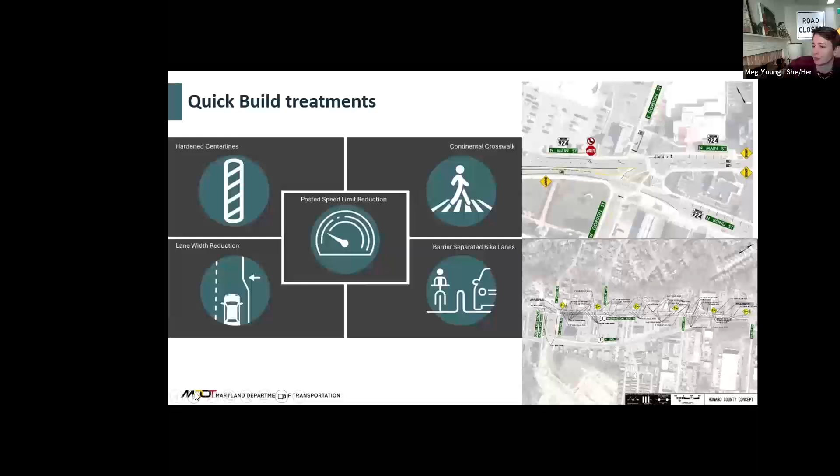So from this, we've had a lot of outcomes. Here are just 2 pictures from Howard County, from the temporary facility, taking a motor vehicle lane and opening it up for people walking and biking.

First of all, Smart Growth America is going to be the one to publish the report on this — that's supposed to be coming out in the coming weeks. It will include the process as well as a lot of the data, interviews from users, and of course all the pictures and everything.

We are also planning our continued education for engineers. I would say the conversations happening between our district engineers and everybody at the workshops was what was most inspiring for me from this process — thinking about how a state route going through the middle of the town of Bel Air, as their main street, does not necessarily need to accommodate the largest freight vehicle out there. It is a main street, close to an elementary school, and talking through those details and different modal accommodations with our engineers was really inspiring.

Thinking about how if we're talking about building out a network for people walking and biking, there's also a network for freight, but they might not always be the same — it sparked a lot of conversations, even about collecting data once we got past the design phase, and how we were collecting data was also interesting to me.

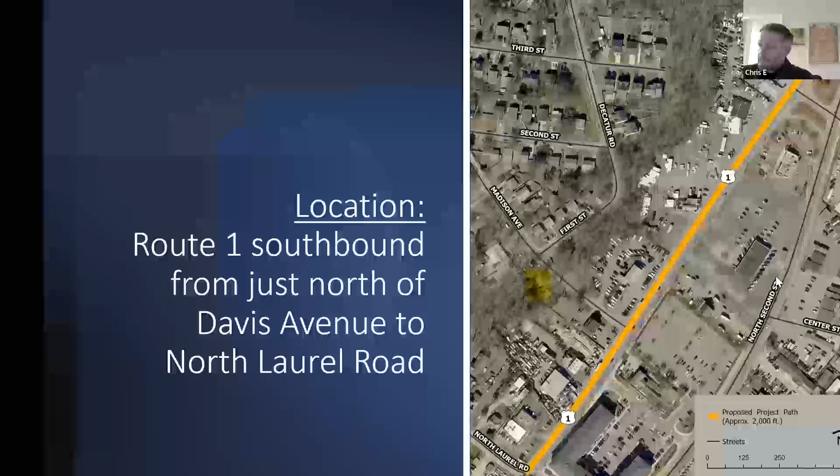So we wanted to see what could be done to work more within those 4 travel lanes on southbound Route 1 and repurpose the outer travel lane into a bicycle pedestrian area, to measure the impacts and see how that changes operations and the pedestrian and bicycle experience. Those were all things that we wanted to look at during the pilot.

So these images kind of show the concept of what we did here. Again, we repurposed that outer lane on southbound Route 1. You can see it both in the aerial drone view and on the street view there.

So we did this for about a 3.5-month period towards the end of 2024. And because it was a temporary demonstration project, we did it with somewhat temporary materials, so mostly flex posts to protect the bicycle pedestrian area, and then a good amount of markings.

As you can see there, all the business entrances were marked as crosswalks across the business entrances, because there's a good amount of them, and vehicles still needed to get in and out of the driveways for all those businesses. So that was very well marked with crosswalk markings and flex posts to basically protect the pedestrians and cyclists from the main travel direction, southbound Route 1.

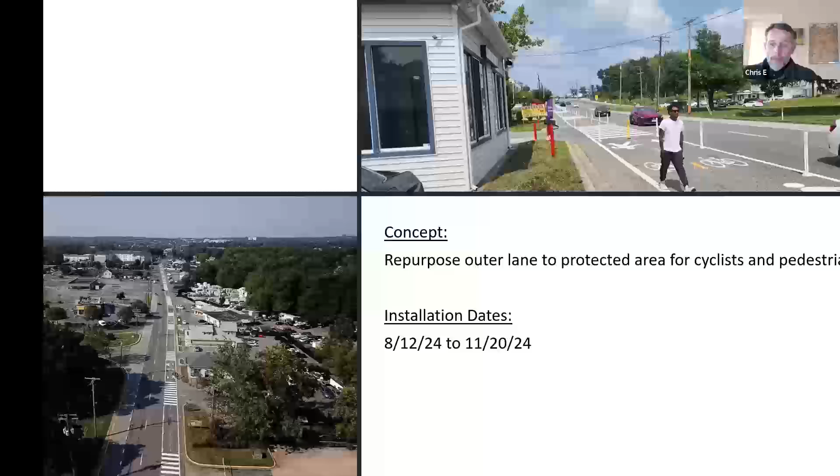We do have some data from the project. Overall, we certainly consider it a success in terms of what we learned, and also we believe we improved the pedestrian and bicycle experience and safety considerably during the 3.5 months of the demonstration project. And the data does bear that out. We have to keep in mind that it's only 3 months worth of data, and some of the numbers are quite small, especially the crash data, which thankfully is small. But it does still point to we made improvements, or at least we certainly didn't make anything worse.

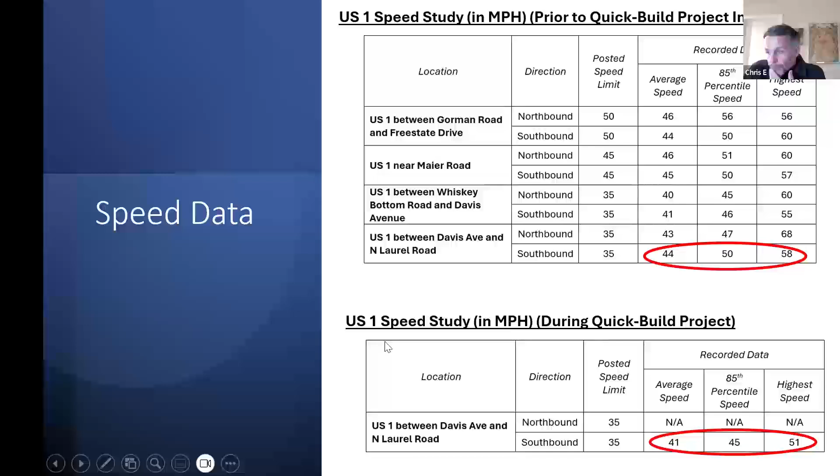And you certainly felt the road was a little slower. I mean, it's still a high-speed roadway. 45 is still a high speed, and some people are obviously going faster than that. So it still felt fast, but it felt extremely fast before the implementation. So that was kind of a bonus finding for us.

We also looked at bike and pedestrian volumes on the corridor. Again, it wasn't really a primary goal to dramatically increase the number of people using the corridor on foot and on bike. It was primarily to protect the considerable amount of people that were already using the corridor without any facilities at all.

But we did want to look at this and get some counts. So we were actually able to work with BMC on this. Charlene was very helpful. BMC has a consultant that can do some bike ped counts using 24-hour, 7-day-a-week video camera counting, and that provided this information.

So this is the counts for the average day in a few different locations on the implementation area. These are bike and ped combined. I didn't break them out, but it's very much mostly pedestrian. There were only a few cyclists sprinkled into these numbers, probably 90 to 95% pedestrians.

You can see there that for instance, in the upper count location, we had 17 people on average per day. The blue arrow with 17 is to indicate the southbound side, and the northbound side actually has pedestrian and cyclists - one cyclist and 2 pedestrians going northbound. So the good thing about that is our installation was on the southbound side there, on the southbound pedestrian side on the west side of the roadway.

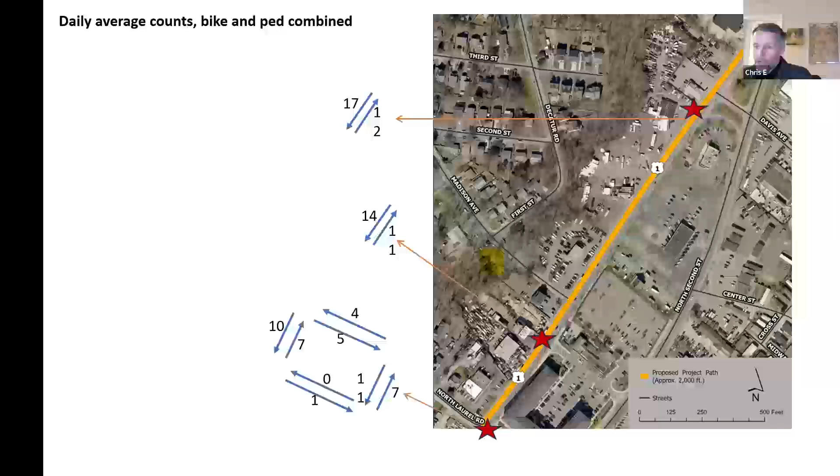To see how that compares to before the installation, we have this data, which is basically before and during, with the red data being from beforehand, which was earlier in the same year. These are average day counts. So again, we can see increases.

It's not super dramatic - the numbers went up from 28 people total going north-south on the Madison Avenue count to 31. Again, you'll notice they've shifted to the correct side of the road where we had the facility. So we were successful in getting people over to the safer side, and a slight increase in volume.

And then similar for the North Laurel Road - this is a signalized intersection with a bit more control and protection, so there's a bit more varied use of the 4 legs. But overall, there was an increase during the installation.

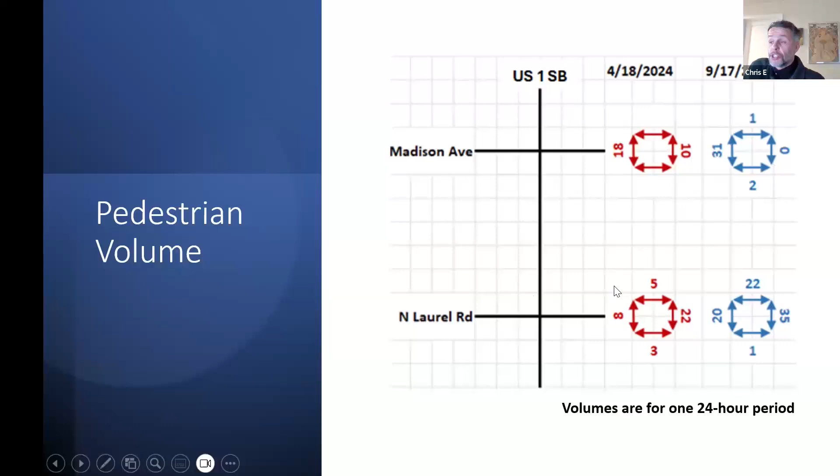Again, not really the main goal - we were trying to protect the people there, but we were finding additional people using the facility as well. These were just pedestrian counts that we had on these numbers.

So just as a summary, it's helpful to have some data from this project. We have lots of more anecdotal and more observational things that we learned as well from the facility.

We did go out and we did actually talk to facility users. We did intercept surveys as well. It wasn't easy to get these because people are not always open to talking with strangers on the street, but we were able to get some of that data, and overwhelmingly found that all the pedestrians and cyclists we interviewed were happy that the facility was there, and they all felt much safer using it with the protection than they were previously.

We also did a lot of outreach to the business owners fronting this section, because they did have concerns about access to their entrance driveways. I think the data shows that went fine overall.

We did not increase crashes. They were concerned about rear end crashes a little bit because we were repurposing that outer lane, but people were still able to turn into their businesses. It didn't cause additional crashes.

That all went fine, and business owners definitely appreciated us staying in touch with them. We had several touch points with them during the project.

Again, just anecdotally, but their main point of concern actually ended up being mailboxes and mail delivery. The mail carrier refused to drop off at their mailboxes, which are curbside, during the implementation. So they ended up having to go to the post office in the city of Laurel to pick up the mail, which is an inconvenience for them, and they were understandably frustrated by that situation.

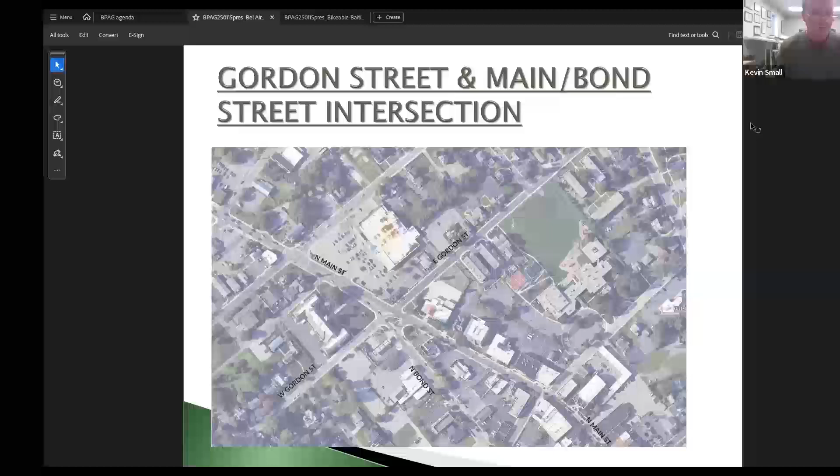This street is considered by State Highway as Route 924. The intersection is located in a split in the road where northbound and southbound traffic separate. It's really the main entry into town from the north part of Harford County, so it's kind of how people perceive the town when they drive into downtown.

What happens is people coming in from the north part of the county are driving at a high rate of speed, then have to slow down to get into downtown where it's very pedestrian heavy—that's the part that really was a problem for us. This location is also where we have walkers going to the nearby elementary school, which presented a real issue for us.

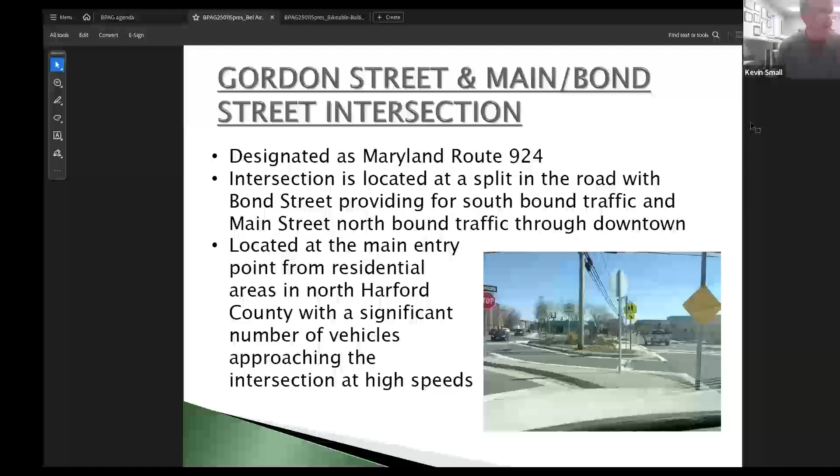It's also at a bit of a crest in the road and a slight curve where the pedestrian isn't as visible, and that condition really created some confusion for people driving into town.

Because this is at a split, you have basically two left turns—one going to West Gordon, the other to East Gordon. During our walk audit, there was an instance where somebody went the wrong way on a left-hand turn in order to go straight across the intersection. That was evidence there was some major confusion, and the number of movements needed to be reduced.

Also, this is a connector to the Liriodendron Mansion, located west of the intersection, an event venue that attracts a lot of folks every weekend and most of the time during the week. That location, again with the confusion, has utilities all over the place—you can see some of the overhead lines—so it really creates limitations on what we can do.

One of the first things we looked at was the pavement markings. We didn't know it, but that was already on State Highway's priority list, so while we were studying the intersection, the pavement markings were improved and the handicap ramps were repaired—we didn't have to take that much further.

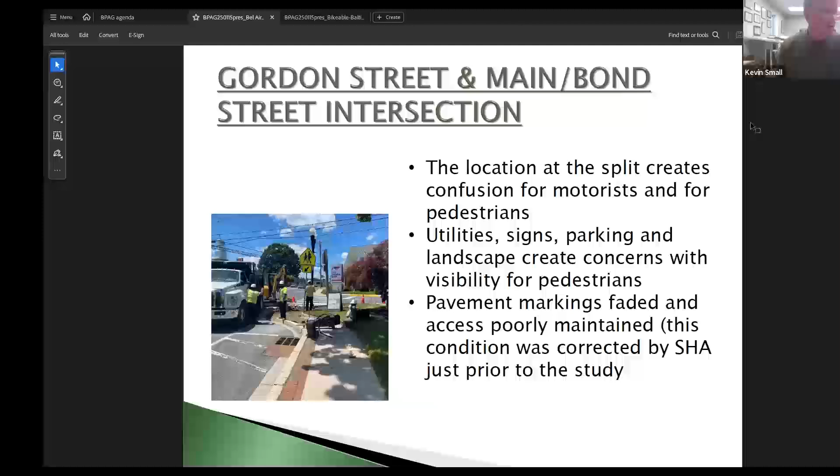Those concerns with visibility and confusion for the motorist were why this intersection was picked and reviewed. We had a public input meeting; a lot of folks showed up and we worked out a plan that I think helped address a lot of those issues.

Gordon and Main again was the highest priority out of all of them. We actually had several others in the running, but that was the highest one.

Out of that, the CSLA project was somewhat begun. This had a series of workshops, which Meg's already explained. There was a walk audit, which was very helpful and I'd highly recommend doing that in the future. It was very educational to everybody. Input was solicited via email, letter, on-site interviews, and web feedback, and we got a decent amount of feedback from folks.

We also had past data on speed, volume, and accidents where we reviewed that. What was nice is we had experts from Howard County, Hagerstown, State Highway, and SGA all looking at this intersection and offering various viewpoints that sometimes we didn't concentrate on or prioritize.

That was the result, this kind of markup of the plan, which was nice to see, that everybody could understand exactly what was being proposed and what was the highest priority, and we could talk that through. So we took that sketch and then created a plan.

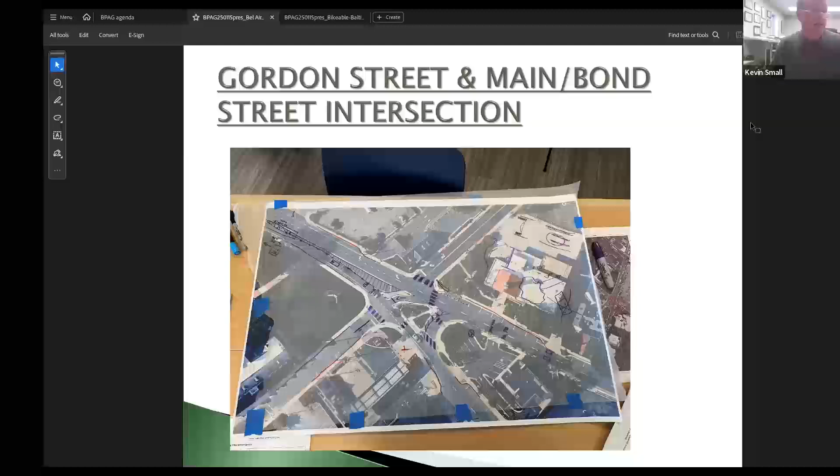Which outlined all of the various improvements, and the most significant were speed cushions, temporary speed cushions installed at the southbound and northbound approaches to the intersection. Speed cushion is kind of a misnomer, there's nothing cushioning about it. It slows down traffic, and that's probably where we had the most complaints, people saying they weren't expecting the jolt when they went over it. But that's where we got great results for slowing down cars, because they learned over time they had to be slower than they did in the beginning.

We closed the left-hand turn going to East Gordon. The turning movement now is only one left-hand turn to West Gordon, and then there's a U-turn that allows people to go back south onto what is called Bond Street. I was really expecting a lot more pushback about that left-hand turn, but once these went in, we didn't get that many comments. They seemed to be okay with not having the ability to turn left off of 924 and go east on Gordon Street.

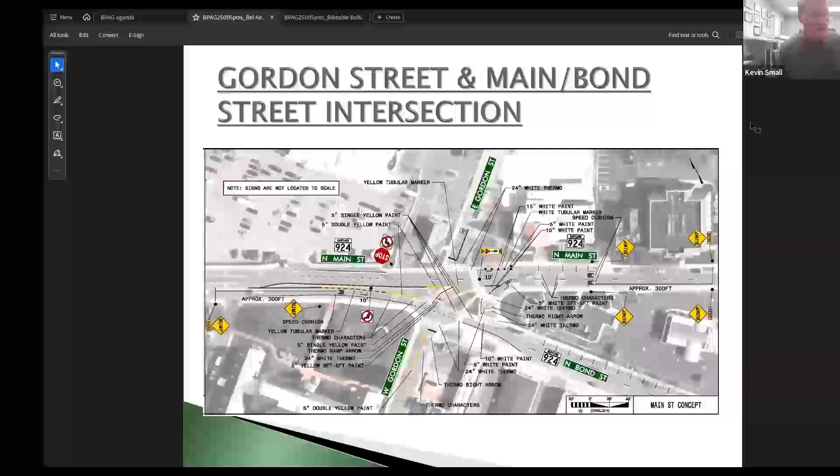We did eliminate a parking space on that side of the road on what would be northbound Main Street, just to increase visibility of pedestrians getting ready to cross, because that's the longest crossing, that's two lanes. And then we narrowed the lane width of some of the turning movements and lanes, such as the U-turn going back south on Bond Street. So there were a lot of various improvements implemented, and I think when taken together it really had a nice effect on the traffic.

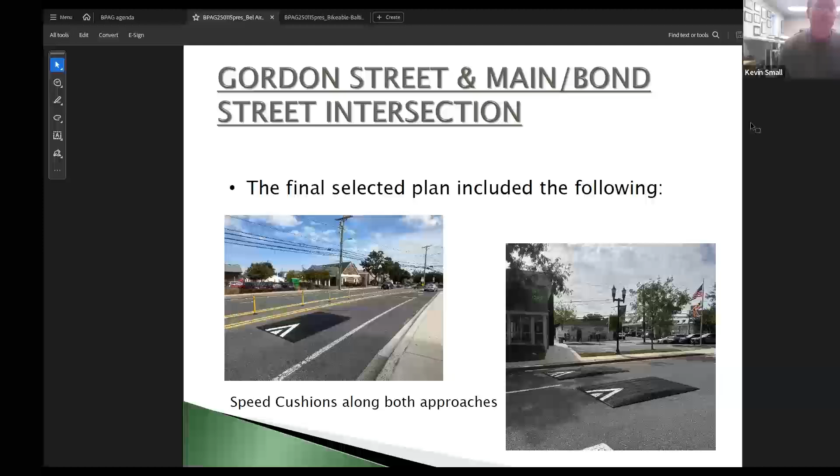I'll click through these. These show the speed cushions that were installed. These are temporary, I think this is one of the first places these have been installed, which is kind of nice. What we'll probably end up doing is taking these, since we kept them, and put them in local streets to see if we can provide a demonstration for other roads that may need speed control.

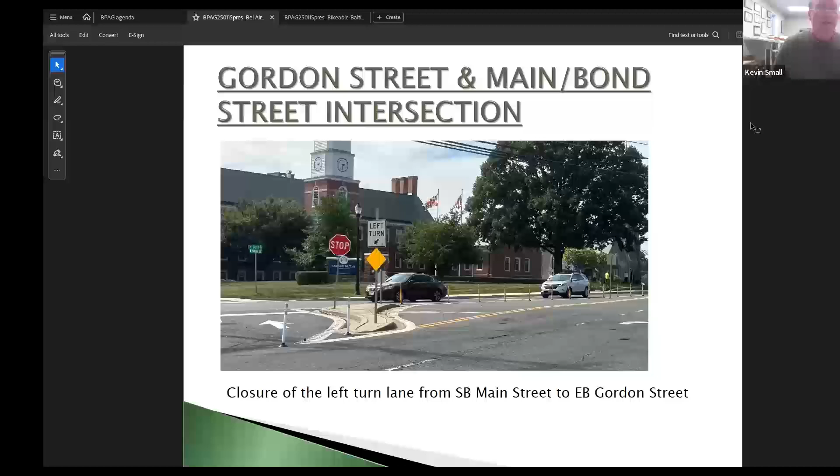That's the left-hand turn closure, which we've had our first snow, and the flex posts are still up, which is kind of amazing. I'm hoping it remains up through the winter, but again, I expected people to be upset, and they have not been, so that was a nice thing.

So the crosswalks again were very helpful, and the visibility of that crossing and where it says PED Xing, I think has helped out everybody's awareness as they move forward or use the intersection.

So we ended up doing measurements before the implementation, and then we did some measurements while it was up. We had a reduction in speed of about 4 to 5 miles an hour, which I was very happy with. I think that made a huge difference with vehicles moving through the intersection.

We already had on our books a kind of area-wide traffic study, and this intersection is included in that. We're going to measure the speed once the improvements have been removed, because we're hoping the users keep their speed down. I can understand the speed will come back up for a little bit, but I'm hoping that a habit will have been created where folks slow down when they approach this intersection.

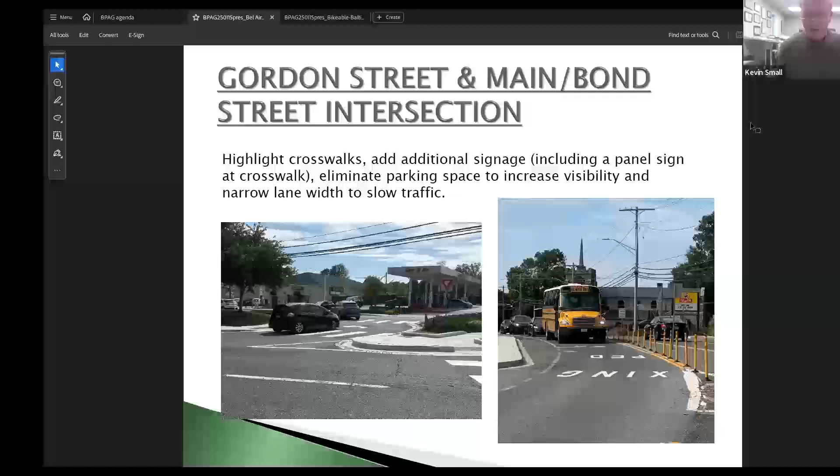We solicited input from various users, again some of the kids going to school and their parents, nearby businesses, users of the intersection. The only pushback we had was the fire department wanted to keep that left-hand turn in, because they're volunteers responding to calls. They figured out a workaround and were very cooperative, allowing us to keep that left-hand turn closed. Again, we conducted measurements of speed and volume and determined there was a nice effect on the traffic. I think people felt they were safer going through the intersection, and especially affecting the kids going to the elementary school, which was our highest concern.

Those other area studies we're going to do will happen probably around April, and we'll provide that to Meg and SHA, probably after they've completed the study, so they can see if there's been any lasting effect.

One of the final things we did, about a month ago, was have our elected officials pass a resolution to request SHA keep that left-hand turn closed and replace it with a median. That will improve the aesthetics coming in from the north part of Harford County into town, and will clean up some of the confusion or the various choices people want to make, like taking left-hand turns or doing U-turns at that intersection. I'm hoping we can coordinate with State Highway to make that permanent, and have that happen next year.

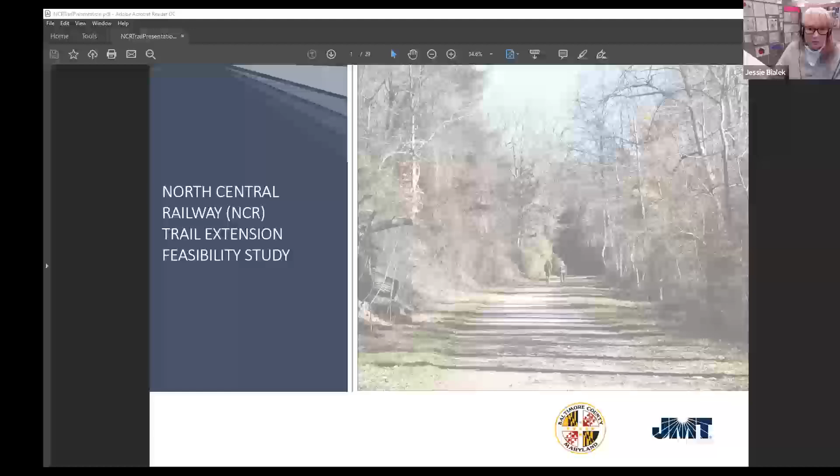Go ahead, Charlene. So just some background on the project. Like I said, the Torrey C. Brown Rail Trail is also known as the NCR Trail or vice versa. It currently extends 19.7 miles from Ashland Road to the PA Maryland line, and then it goes north from there into Pennsylvania to the York County Heritage Rail Trail and extends an additional 21 miles north to York, PA. The existing trail surface is 10 feet wide with a stone dust surface and is managed and maintained by the Maryland Department of Natural Resources.

So the goals for the project were to look at extending the trail approximately 7 miles south into Lake Roland, which basically then hits the border of Baltimore County and Baltimore City, and to create a trail that's accessible for all users, improve active transportation, and of course minimize impacts to natural and cultural resources in the area, and encourage people to use more active transportation.

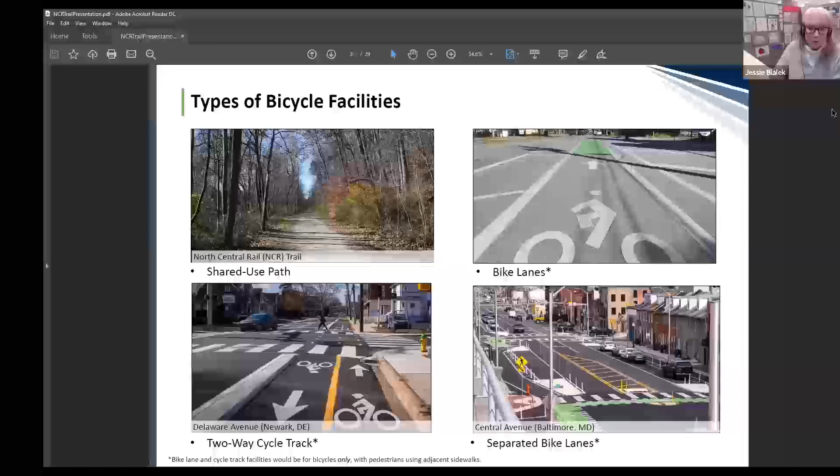So what I'm going to show next on the right-hand side is a key map going from north to south, showing what in our extension project Baltimore County considers our most feasible option for a connection between the two. I won't bore you to death reading off every single one, but I wanted to give folks an idea of where we were looking. Just an FYI, we have the whole extension study on our webpage, which I can send a link in the chat for so that people can review the entire feasibility study at their leisure. I believe it's like 200-some pages long, so trying to condense that for folks is a little bit difficult. So I thought maps would be best.

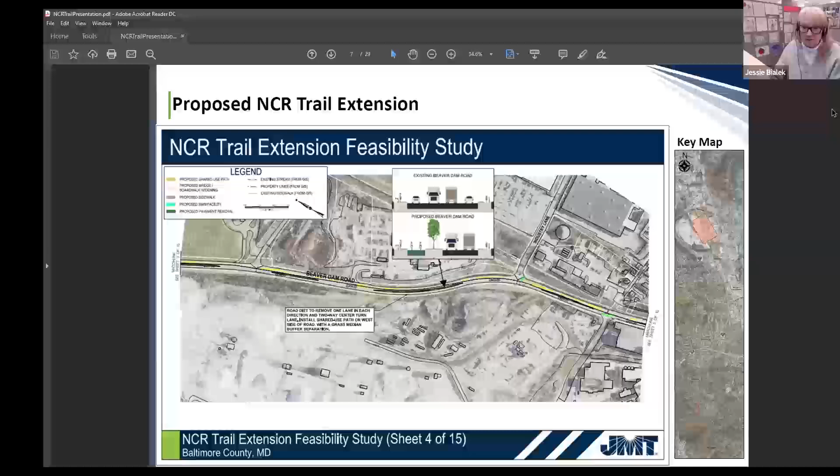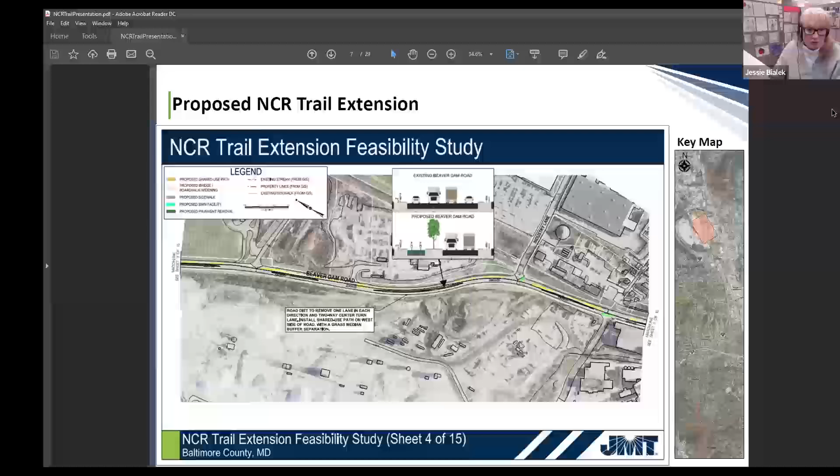So if you're getting confused, I'm pointing so people can see. On the right-hand side is our key map, so each time I go further south, it kind of shifts down, hopefully that can keep people more oriented as to where we are. So moving south along Beaver Dam Road, which basically is Warren Road, it just kind of changes names, we would be continuing the road diet to remove one lane in each direction and this two-way center turn lane to do a continuous shared use path along the west side of the road with a grass median and buffer for separation there.

Same thing along Beaver Dam Road all the way down to where we intersect Padonia Road. We would have to put in a small bridge along the shared use path of Beaver Dam Road.

And then there's a proposed crossing at Padonia Road for the trail, which would be located on the east side of Deerco, which is Beaver Dam Road. It changes names again to Deerco Road as you head further south on the map.

Again, we would be looking at doing a shared use path along the east side of the roadway this time on Deerco instead of the west side. So as people cross at Padonia Road, we'd have to do a legged crossing to get people to the other side.

And then we would be transitioning from a shared use path adjacent to the roadway to a two-way cycle track with physical separation once we hit Greenspring Drive, which is again the same road with a third name. Fourth name, third name, I can't keep track.

Basically, that two-way cycle track would have physical separation from vehicular traffic along Greenspring Drive, and then pick back up on Timonium Road. Then we would utilize the existing sidewalk and install signage because of the highway overpass that we were about to intersect into.

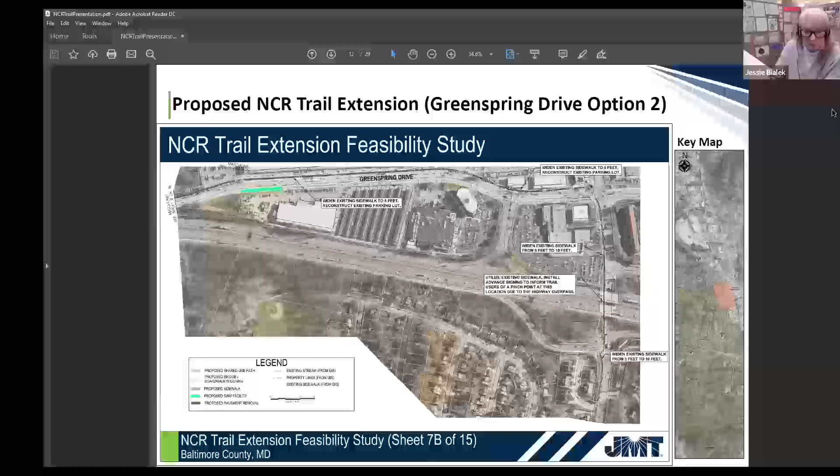And so we would do the existing sidewalk instead of the two-way cycle track along this area, and then continue to use the sidewalk as we traverse the highway interchange there with I-83.

Then we are hitting Timonium Road at this point, so we would be widening that existing sidewalk from 5 feet to 10 feet.

All good. I was just going to say, depending on which direction you take, we would also be installing separated bike lanes along the road heading to the south, which is Thornton Road.

We'll take Thornton Road all the way down with the separated bike lanes on each side of the roadway and pedestrians utilizing the existing sidewalks.

Thornton Road then dead ends into Seminary Avenue. We would install separated bike lanes along each side of Seminary Avenue until you get to the highway overpass, and then we would transition into a shared use path, which would then transition into a two-way cycle track with physical separation.

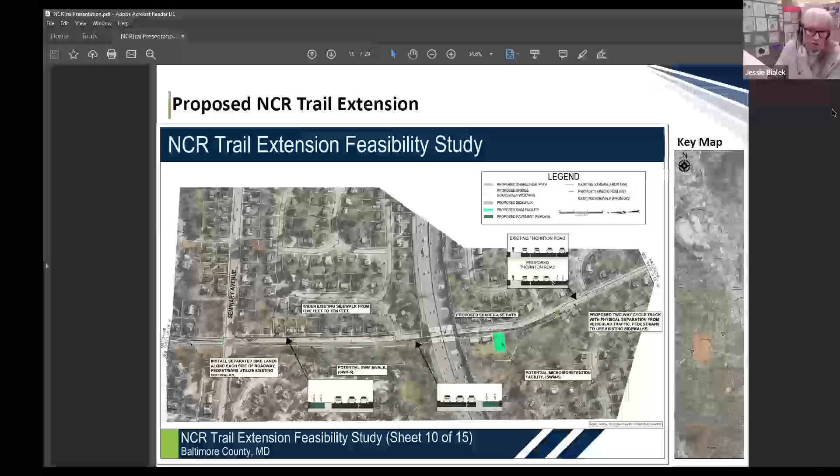Moving along, there's actually some county-owned right-of-way here that was old HOA property that we would be looking to install a shared use path in, to get folks off of the roadway while still heading south on Thornton Road, where we will then intersect West Joppa Road.

So then we would be doing a bike boulevard and putting in new sidewalk, and that's just a little residential court there, and then putting in a little proposed bridge across Roland Run, and going back to a proposed shared use path heading down south into Lake Roland.

Same thing, continuing on the shared use path. And then as we get closer to Lake Roland, we would need to put in a proposed boardwalk, and then we would use the existing unpaved trail that heads into Roland Park from there, Lake Roland, excuse me.

And then this was the second option that we had as well, where instead of using the shared use path off the road, we would be installing bike lanes and a two-way cycle track along Thornton Road. So we'd do either one.

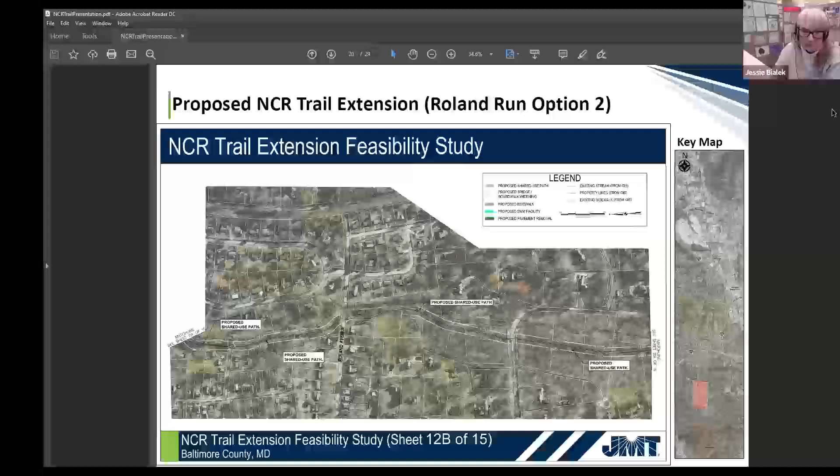And then same thing for this one, except we would be changing and not using that small court to the north, but continuing along the south of that to make a shared use path that would then intersect Roland Avenue and then continue across that into the park property. Same thing here.

So now we are in the Lake Roland proper property. We were tossing the idea back and forth of converting the existing unpaved trail into a paved shared use path, or doing something similar, which is a crush and run or stone gravel situation. We hadn't made it that far yet, but we'd do some sort of trail enhancement.

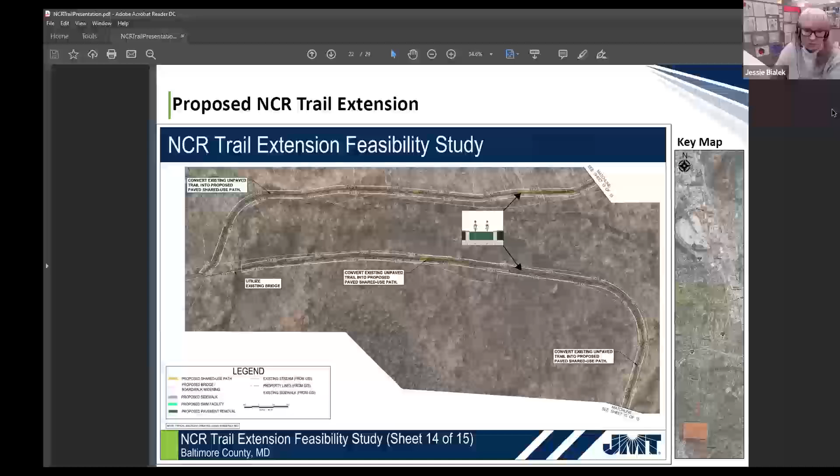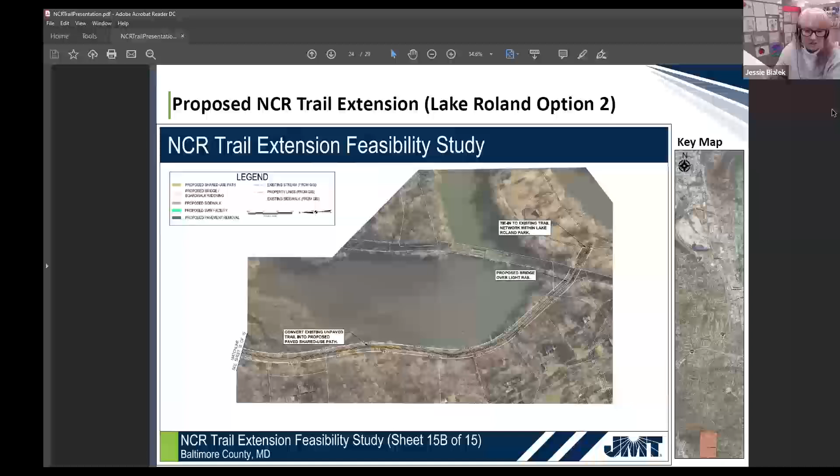Again, tossing back the idea of converting the existing unpaved trail into a more shared use path format, but not exactly sure. This option shows us that we were thinking about putting in a proposed bridge over the light rail, but MTA was not necessarily a fan of that. They said they would have to look into it, but couldn't really say yes or no when we presented them with the plan months back. And then again, tying back into there.

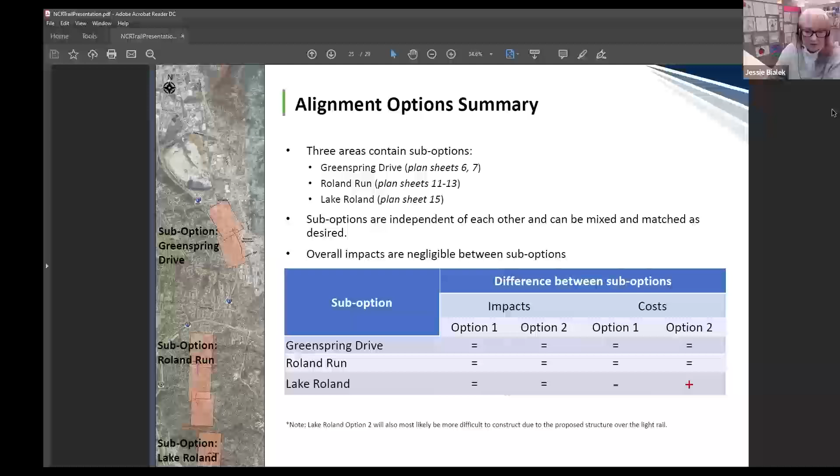So this was just an alignment option summary showing the sub options we had for Greenspring Drive as well as Roland Run, and the impacts and costs between the options. Most of them are negligible between the sub options, with option 2 of building the bridge over the light rail tracks, of course, making the cost go much higher for that sub option.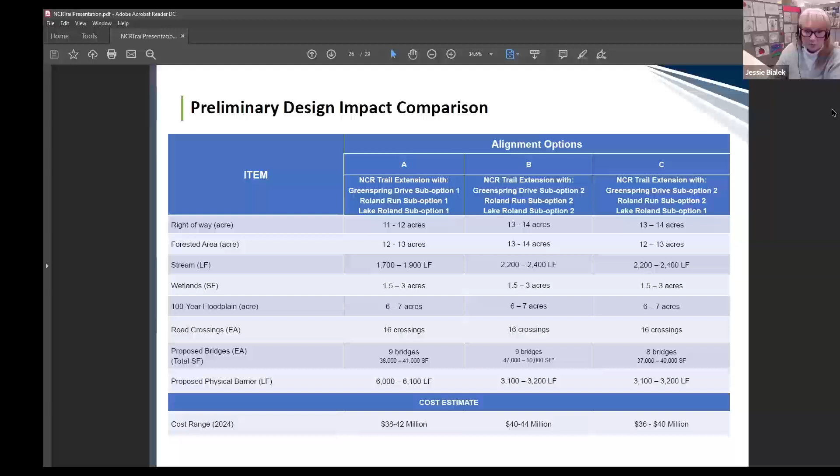And then we did a preliminary design impact comparison with our sub options, as well as a cost estimate and cost range. Of course, building a bridge over the light rail would bump the cost up significantly.

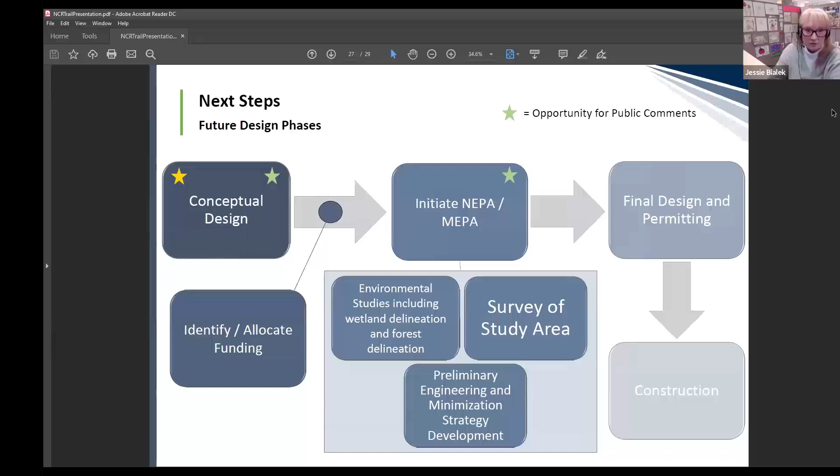So these are our next steps for future design phases. We finished our conceptual design and feasibility study. Our next step would be to identify and allocate funding to a phased approach to the project. We currently do not have any funding in the county's budget to continue with further design at this time. But if we were, then of course we would have to go through NEPA and MEPA and do all our environmental studies, including wetland delineation, forest delineation, as well as preliminary engineering. You all know the drill, so I don't need to go through that. You're all experts on this.

And that's it. That's my contact information at the bottom. If you would like to get a hold of me, I will stick in the chat a link to the full feasibility study for anybody that's interested in reading all about it. And that's the end of my presentation. Anybody have any questions?

Well, that's a lot. It's a lot. It's very impressive.

I imagine you're going to phase this, or are you biting it off at once? Oh no, there's no way. So where do you start? We would start at the north end where the existing terminus is, because there's already existing right of way there. The trail, like the railroad bed, is already there, and that just seems like the most logical place to start. Gotcha, because we wouldn't really have to acquire right of way or re-engineer a bunch of stuff. It's just a lot easier than going from south to north.

Could I ask how far down that first phase might go? I don't know at this point, since we don't have any funding to do any more work on the project at the moment. We haven't put a ton of thought into what that phasing would be like, but internally that's where we would start, would be the north.

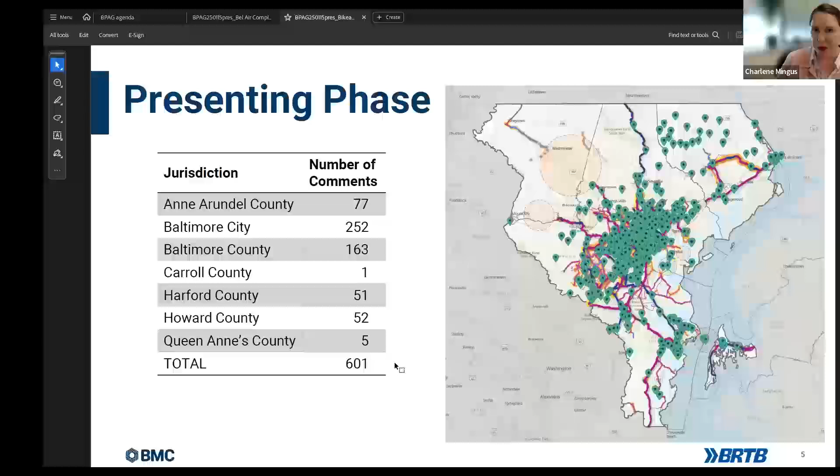This is an image of the online comment map where people could place points and provide different comments about the proposed regional bike network. We received a good number of comments throughout the region, which was great to see. So we've got our total numbers here, which add up to the 601 total comments.

We asked for people's input, as I mentioned earlier, that'll help identify needed changes to the regional bike network. The comments will also shape the project's recommendations for implementation strategies, and will help us as we refine the performance objectives and performance measures, which are the ways we'll measure the success of the regional bike network over time. So I want to thank you all for helping spread the word, especially our partners, many of you who are here today. I just wanted to highlight some of the ways that this comment period was shared.

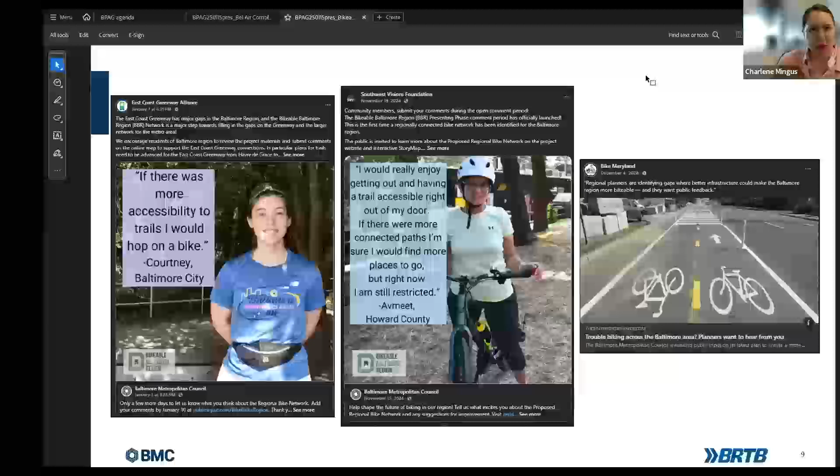So you guys shared it in emails and newsletters, like Commuter Choice Maryland and City of Annapolis. We also had some of our partners reshare posts on social media, which was really great - East Coast Greenway Alliance, Southwest Visions Foundation, Bike Maryland, and many more.

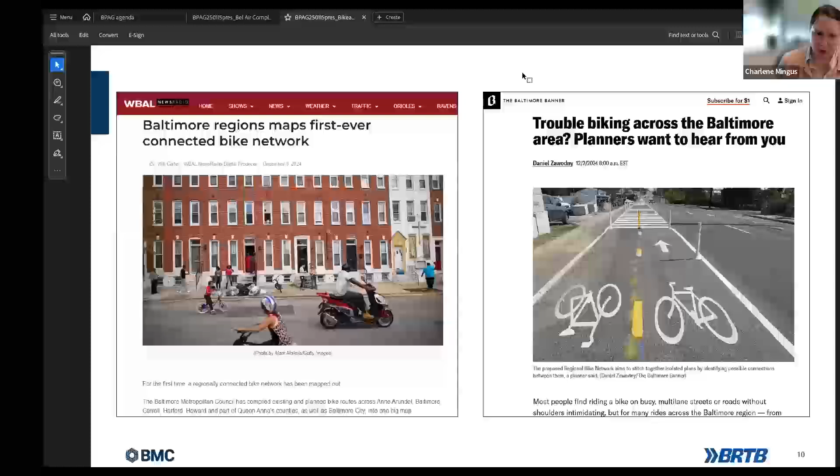And the project was also featured in two press pieces, with WBAL News covering it, and then the Baltimore Banner, which we saw an uptick of traffic when those were released, which was great to see.

BMC also shared it through our social media, through various posts highlighting the comment period and our public meetings, and also using some of our handlebar interview graphics to try to reach more people. We also featured it in each of our active transportation newsletters, which go out monthly to around 5,000 subscribers.

So that's a quick update on what's happening with Bikeable Baltimore Region. I'll be following up with the steering committee members as we schedule the date for the next meeting, and then following up with our advisory committee members. So many of you will be getting an email from me soon.

Did anybody have any questions?

Charlene, I wanted to ask about how you're managing some of the backlash. I attended the online public meeting, and there was a decent amount of pushback - I think it was just a couple of individuals, but they were really trying to make their feelings known strongly. It wasn't so much against the plan itself, just against biking improvements specifically in Baltimore City. I don't think that's a huge surprise to most of us who know there's a faction there, but it's certainly cropped up in your outreach and public input, along with a lot of very supportive feedback too. So what's the strategy, or how is that working itself through the outreach system?

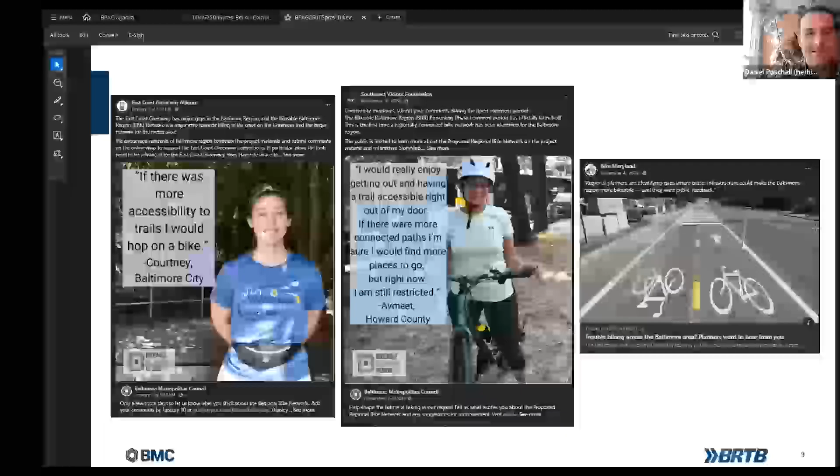I'm curious if there's a strategy, or if it's case by case, for how you get the network to be as close to family friendly as possible, knowing there will be some places that are LTS3 or higher that only certain cyclists will ride, versus creating a trail-like experience where maybe one day this network could be envisioned as a trail network.

So yeah, you mentioned the level of traffic stress, an analysis that the state did which we also used, quantifying bike facilities and roads on how comfortable or stressful they are to bike on. This plan's goal was to primarily identify a network of lower stress facilities that are comfortable for most people to bike on, not just experienced cyclists.

We did identify a number of areas where there are gaps, where there aren't any planned or existing facilities, that could be addressed later, and some high stress segments. BMC is going to work with our partner jurisdictions to figure out how to address those going forward. Once this project ends in June, it's not going to be a static map — we anticipate it being updated over time as plans change and area studies are done, so it can better reflect a connected low stress network.

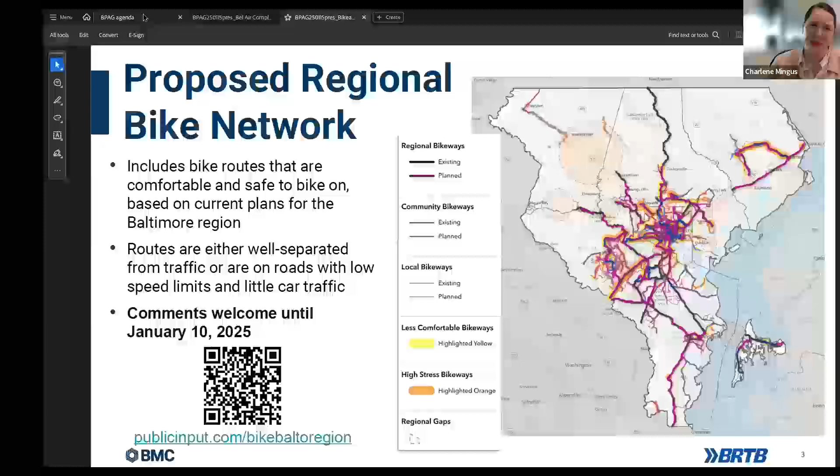Okay, that's great. All right, we're getting close to the end of the agenda here. We're now at the always fun roundtable discussion where we go around from jurisdiction to jurisdiction and representatives share updates on active things going on in their world. So I always have the pleasure of starting with City of Annapolis.

We are also working on other connections in the city, some of which have been funded by the MDOT Bikeways program, and hopefully getting started in February or March on at least the RFP for the Bay Ridge Avenue Bikeway. We have a few others in progress, but I know Will, you're on the line too from Annapolis, my colleague from the Department of Transportation — is there anything else you would like to share?